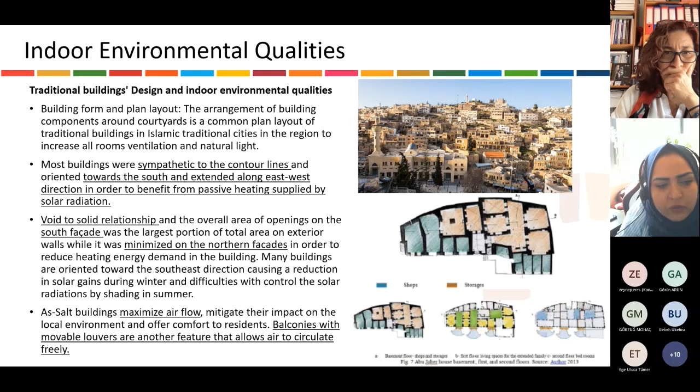And many buildings had balconies with movable louvers, another feature that can allow air circulation freely in the building. So the courtyard in those houses was actually a very important aspect of sustainable measures, where there are multiple courtyards in those buildings, whether it's in the middle of the house, on the rear of the building, surrounded, or on multiple levels.

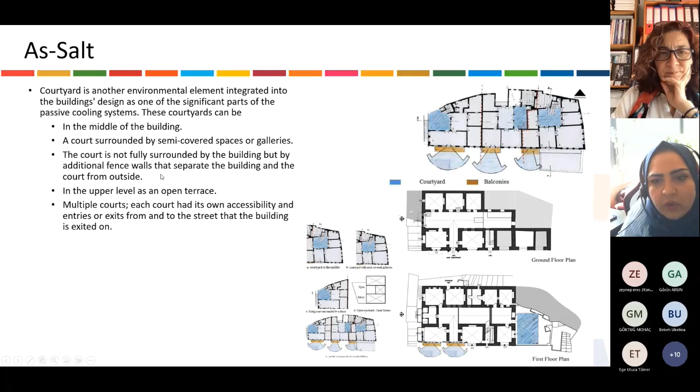Those courtyards have been proportioned in a way that allows adequate shading in summer and allows sufficient solar radiation gains during winter. There are cross openings in those courtyards and on the main facades that allow cross ventilation. Actually, most houses had either a north cool courtyard and a south warm courtyard. These were designed to provide thermal comfort in a building by means of evaporative cooling and cross ventilation.

The cold courtyard is considered to be shaded in most of the daytime, so it's meant to be shaded and it's meant to cool the air coming into the building, while the other courtyard is meant to be not shaded, so that it would increase the solar radiation gain into the building.

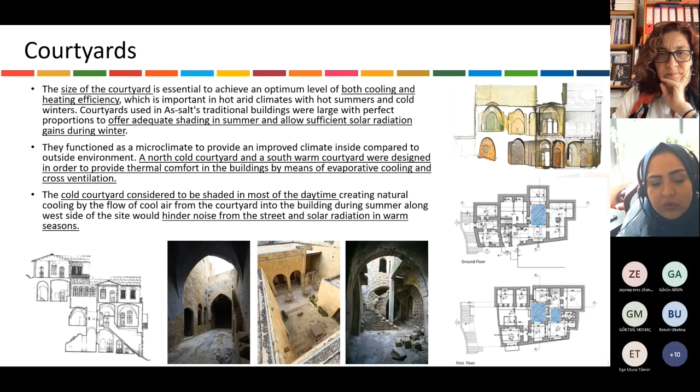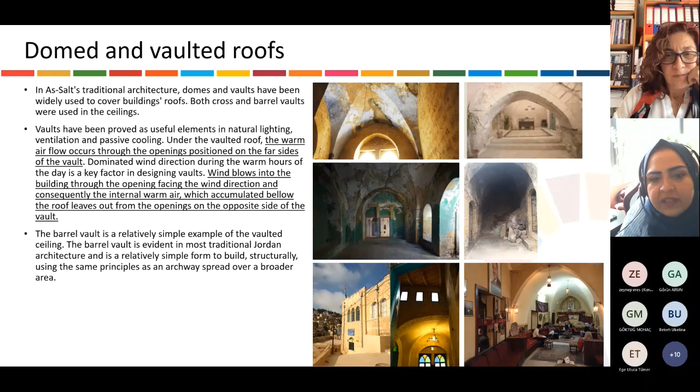The roofs, domes and vaulted roofs are also a very important aspect here. So the thermal capacity of the roofs allows the warm airflow to occur through the openings positioned on the far side of the vault. Still, the wind blows into the building through the opening facing the direction. Consequently, the internal warm air which accumulates below the roof would leave the building from the other side. So that is one of the attributes towards smoothing out that transition between the morning and the evening time.

So the opening itself, the shape of the opening, is more like tall arched openings with clerestory windows, high ceilings in most of the cases, with interior courtyards, looking into the interior courtyard, but also looking into the main facade with different louvers and shading devices. Mashrabiyya was not common, but it was used in some cases.

One of the pictures has it, so it's grilled wooden window screens that are used to control the entry of the sun. And then the location and the size of the window has been also regulated in order to regulate the circulation of the air in the building. Placement of the openings bordering the courtyard is also very important. Clerestory windows have been also used in order to allow this cross ventilation.

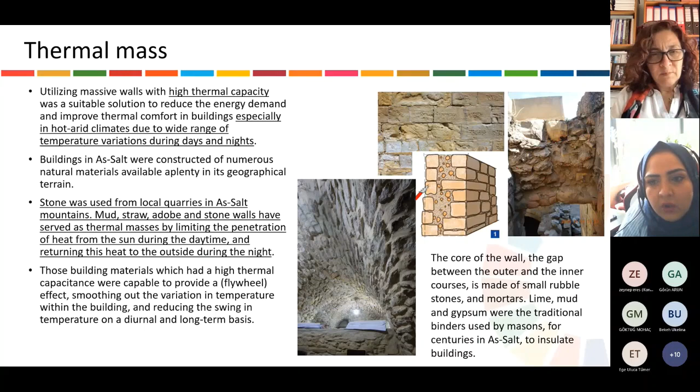Thermal mass actually is a very important aspect here, because the walls were actually very thick. It varies from 80 centimeters to 120 centimeters. The material in between was all filled with rubble stone that acts as a natural insulation. And the material that has been used is locally produced by local quarries in Salt city itself, which also contributes to lowering the transportation energy, with the quarries and the material all from the city itself.

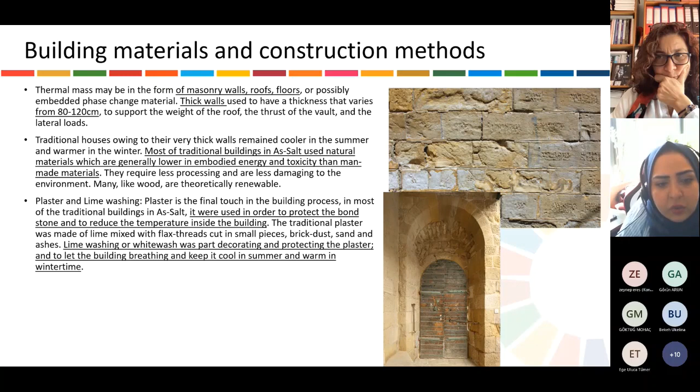Second of all, the material of plaster and lime washing. So the plaster and lime washing are the finishing material over those stone walls, and the plaster is used here in order to protect the stone and to reduce the temperature inside the building. The lime wash is also the decorative aspect, but also protects the plaster and lets the building breathe. So that's the aspect. It's not like concrete. It allows the building to breathe and keeps it cool in summer and warm in the winter.

So in conclusion, feeding back to SDG 13 and to how these lessons from vernacular architecture could contribute to SDG 13, we now need to acknowledge what heritage can contribute to climate change, and we need to learn lessons from it, not only protect it but also use it in contemporary architecture by looking into natural building materials with relatively low energy content and lower transportation energy, by using natural thermal insulation,

by using thermal massing, and by understanding the climate that we are in, in order to understand how we need to mitigate those aspects and not just follow the footprints of what's already there. We need to think of how these aspects were solved earlier on, so that we can think about a way and a methodology to conserve that and to fight against climate change in the next generations.

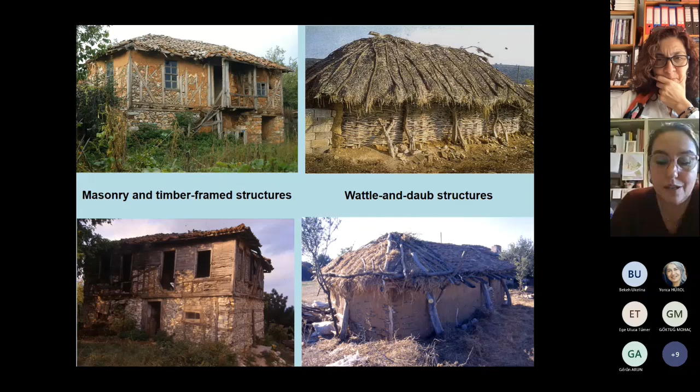Even though oak forests cover the Istranca region, displaying a notably homogeneous environment, diversity in local architectural practices is astounding. One-story or two-story buildings, massive and solid buildings, or houses with semi-open spaces, masonry, timber frame, or mixed structures, and we have to mention especially wattle and daub structures are very common in this region. And cruck-like structures. We know this type of structure from medieval houses of England, the so-called cruck buildings. Because the structural system of these buildings in Thrace is similar to cruck buildings, we use the term cruck-like buildings for these structures.

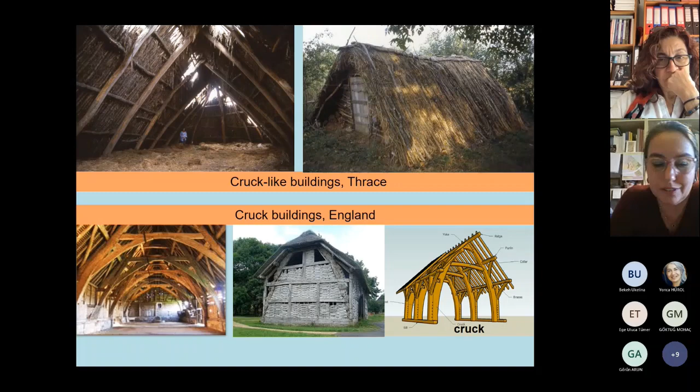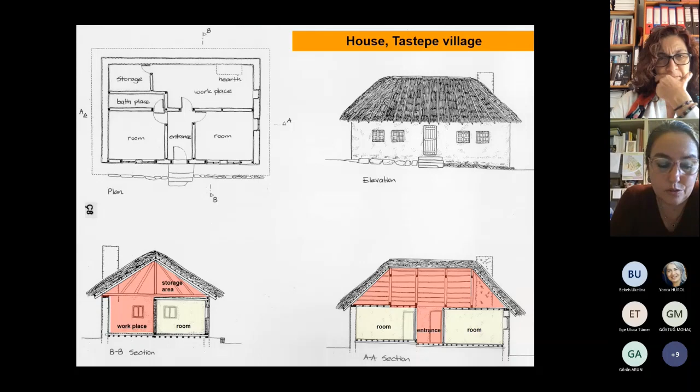The height of the rooms is only 2 meters. The workshop space does not have a ceiling under the roof. The height of this space is more than 4 meters. As the roof is very high, the upper side of the flat roof of the rooms is used as a floor for storage. The north, east, and west walls are masonry, but the south wall, the entrance side of the building, is wattle and daub structure.

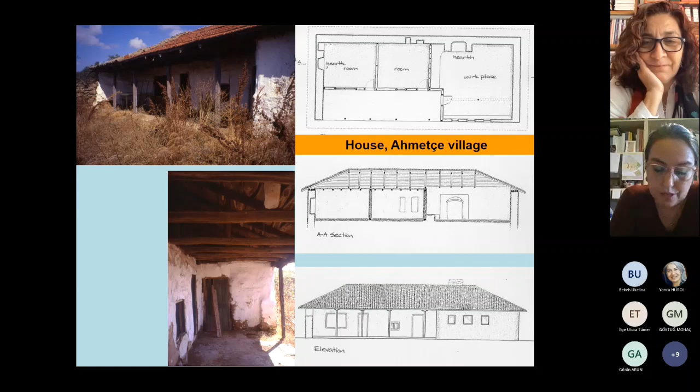This house is located on the southern slopes of the mountainous area. It has a low pitch roof covered with tiles. This one-story house has a semi-open corridor in front of the rooms. All the rooms are open to this corridor. They don't have an interior connection. Like the previous ones, its northern walls are masonry, but the south facade is wattle and daub structure.

And when we think about the diversity of the architecture, one of the reasons is the variety of building material. There is oak in the forest, limestone and andesite in the rocky areas, earth and reeds around the rivers. All these materials are useful as building materials. And the traditional demography of the region should also be considered. There have been Turkish, Greek and Bulgarian villages in history. The first house that I showed you is a Bulgarian house, the second one is a Greek house, and the third one is a Turkish house.

As you know, from the 18th to 20th century, the Ottoman Empire lived through a lot of wars all over the country. During this process, communities from the Caucasus, Crimea, and especially from all over the Balkan Peninsula moved to this region. In the beginning of the 20th century, the Greek and Bulgarian communities left the area. So the newcomers sometimes established their own villages in their own tradition. Sometimes they were settled in abandoned villages. So they lived in these villages, and over time they transformed the buildings according to their tradition. Or they used the old buildings and built new houses in their own tradition.

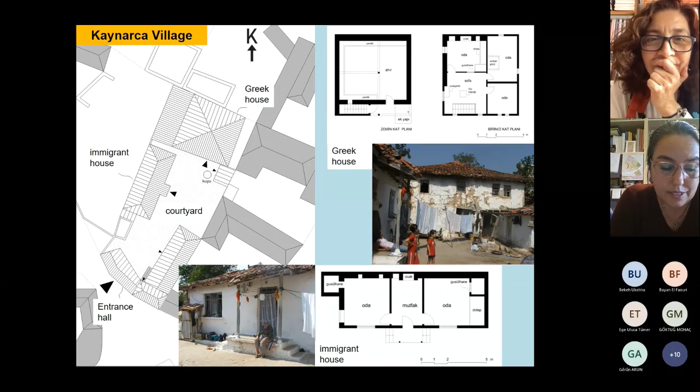For example, in Kaynarca village, because of the population exchange agreement in 1923, the Greek house was given to an immigrant Turkish family. In time, when the family needed more space for their children, they constructed a new house in their own tradition in the courtyard. This is a very typical West Thrace Turkish house. So we can say that, like the towns, villages can be multi-layered as well.

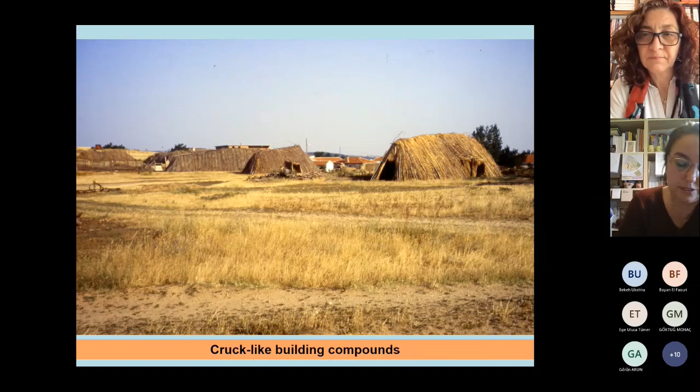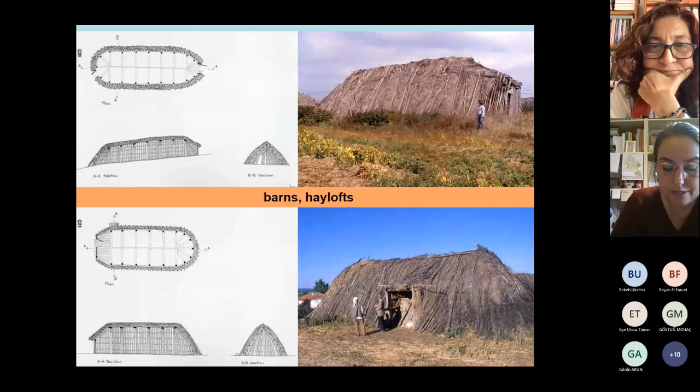These are examples. For example, these are huts. They are round or ovoid-shaped buildings. And these are barns, haylofts, and they are linear-shaped buildings. There are sheepfolds. They are in curvilinear form. This structural system is suitable for creating different forms in architecture.

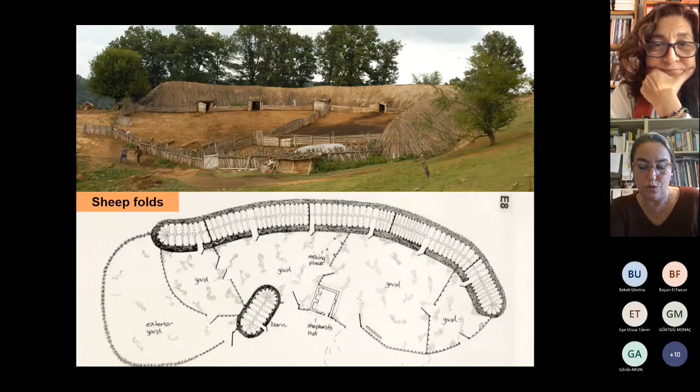Our study on the architectural heritage of the region has indicated that the cruck-like structures that we had encountered in Eastern Thrace was a practice widespread beyond the present political borders in Greece and in Bulgaria. Accordingly, developing a mutual understanding on shared architectural heritage is possible only by holistic approaches working beyond the borders.

One other significant outcome of our work in Eastern Thrace has been to view the connection between the wattle and daub architectural practices of our times with that of the distant past. What we have observed in the present-day villages of the Istranca region is almost identical to the early prehistoric cultures of not only Turkey but also of a much wider geographic region extending to most of the Balkans.

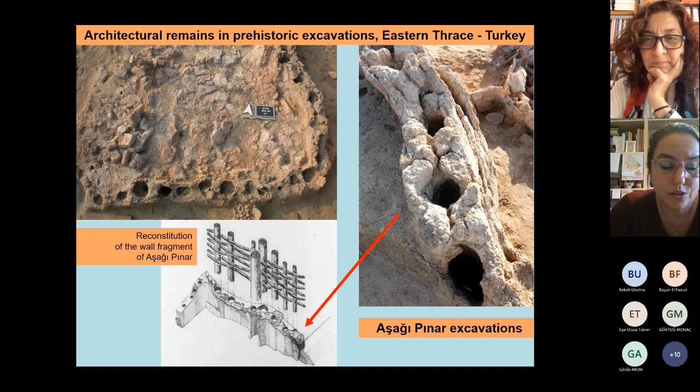Our study has revealed how the use of wattle and daub architecture was practiced and evolved through a period of over 8,000 years. Here you can see the architectural remains of Aşağıpınar excavations in Eastern Thrace in Turkey. This is our excavation and our reconstitution study for the wattle and daub walls. And here you can see the reconstitution drawings of these building remains. So these are the houses of Aşağıpınar in 5000 BC.

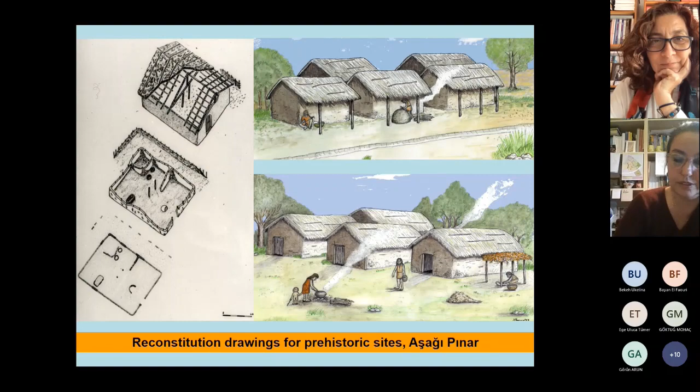The forms of those buildings resemble those of rural structures of our times, enabling to link the past with the present, if not culturally, at least on the basis of technologies implemented through several millennia. We might also conclude that the remnants of present-day village architecture constitute a time lapse in visualizing the architectural remains of the distant past. And our second study area has been the western part of the Urfa province.

There, within the framework of an inventorying program, we have surveyed 413 villages distributed in an area of about 1,700 square kilometers and documented the traditional rural buildings of the region. And our lovely colleague Ege Uluca Tümer also joined our study for one season at that time.

Here you can see some examples of the buildings, mud brick structures, masonry structures, one-story, two-story buildings. Parts of the region extending along the valley of Euphrates and the plain of Suruç are mostly alluvial flatlands separated by undulating plateau occasionally broken by rocky outcrops. At present, the region displays steppe conditions, being devoid of any forest cover. This is a very typical view of the region.

And our work in the Urfa region has revealed the presence of three basic plan types. The first, flat-roofed, long rectangular structures with entrances usually from the center. The second, with open porch entrance, the so-called iwan, again flat-roofed type. Third type is a multi-roomed structure, almost cellular, each unit being closed with a conical dome.

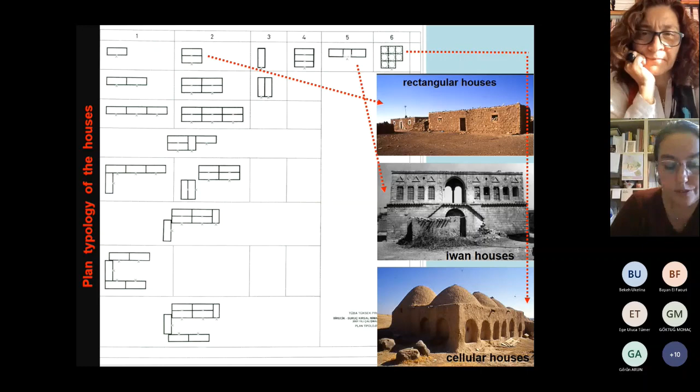In this respect, in strong contrast to that of Thrace, the region displayed a notable homogeneity in types of rural structures, being reserved to the above-mentioned three plan types. This uniformity of structural types, in view of dynamic population movements that took place throughout historic times as well as at present, we have found to be of considerable interest.

An example for long rectangular buildings: this is a very simple flat-roofed house, just one room and two ovens, one inside, the other one outside of the building. The building is a pure basic prismatic form, but the triple arch facade is quite decorative.

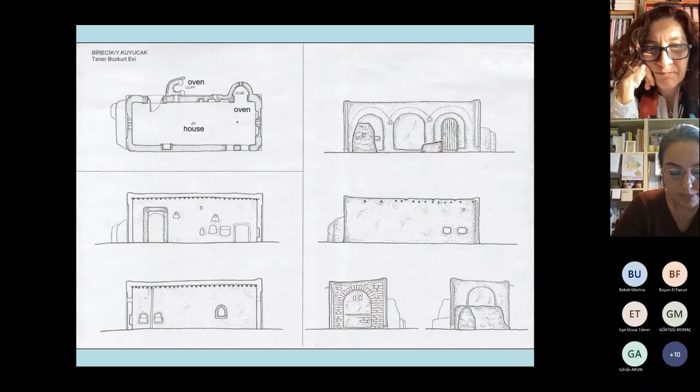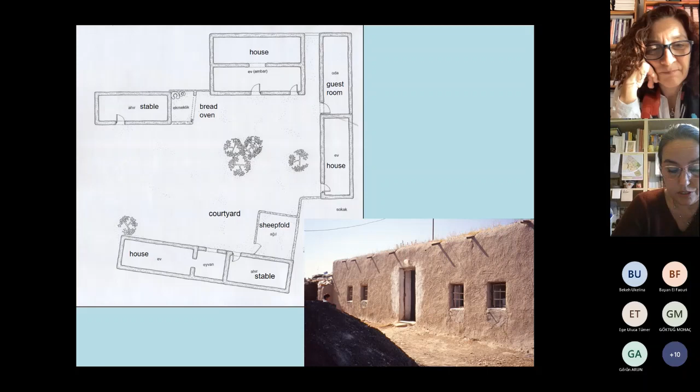This is a house compound of a family. Each building has a different function: house units, guest room, stable, barn, sheepfold, and they surround a courtyard. This house compound contains all the units of a small-size enterprise of traditional agricultural economy. And another example for flat-roofed rectangular houses.

So-called cellular houses, also named pseudo-domed mud brick houses, are one of the basic plan types of the region. The domed structures are located mainly in the Suruç Basin. We observed such kinds of structures in 139 rural settlements. Here you can see some examples of domed structures. In 2002, we counted 2,760 domes in the entire region.

The domed constructions are formed by the juxtaposition of small square units of 4 meters in length maximum. The articulation of units may form huge complexes. A domed dwelling may also contain places for food production, guest rooms, workshops, storage rooms, haylofts, barns, and stables. Here you can see some different functional parts of a household.

Interior of the domed spaces. At the top of the dome, there is a hole. It's actually a flue. As there is an oven in the center of the room, this hole is used as a chimney.

Along with field documentation considering these types of structures as cultural indicators, our study also covered defining their distribution in space and in time. It is also interesting to note that Sir Layard, while working on the archaeology of this region, had documented a village entirely of similar domed structures in the vicinity of Aleppo in 1853. Likewise, Edward Wanze, a German explorer working in the region in 1912, had noted that domed structures had a distribution area from Suruç and Harran plains in the north to Aleppo, Hama, and Homs in the south.

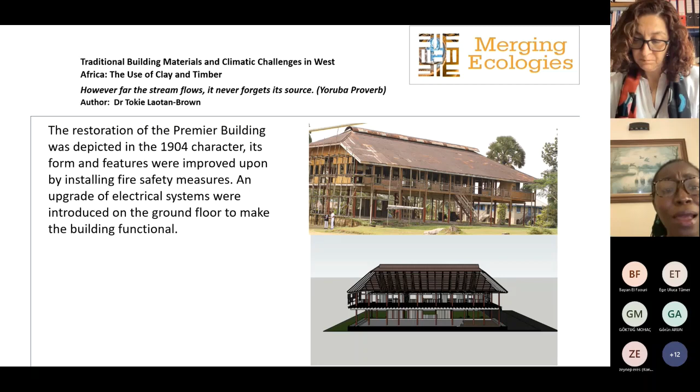And this is what we're hoping the building would look like. Thank you very much. Thank you so much.

An interesting journey in West Africa, and seeing all these vernacular examples. I think it's really what you are doing, like trying to change the mindset, or shift the mindset basically, for remembering the traditional ways of constructing. Anyway, I will have some questions, but let's go to our last but not least speaker.

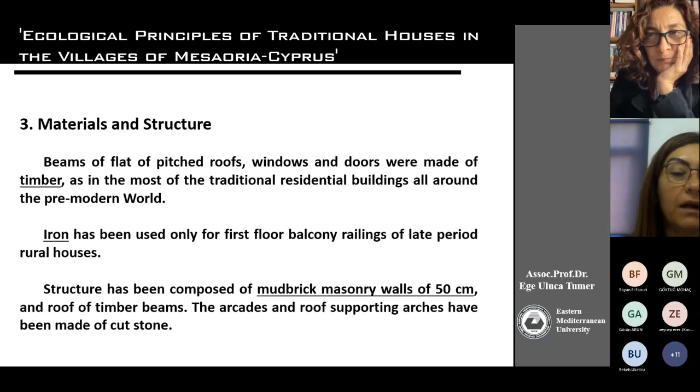Iron is very rare. We see the use of iron only in late periods in the 19th century. The mud brick masonry walls were around 50 centimeters thick. The arcades and roof supporting arches were cut stone.

This is an example of Mesaria houses, from Akdeniz Lisi. We can see the use of mud brick on the side wall where the plaster has been detached, and here again another mud brick masonry wall where the roof has collapsed. We see the doors and the stone surrounds around them.

The doors were wooden, though we see some of them have changed. Again, we see another example of a timber door and stone surrounds. This is the iron railings from the late period houses, on balconies.

I want to talk about the main architectural components, the main spaces in these buildings. We see a very modular design: the room is the main unit, arrayed in linear order on the ground floor due to increasing demand or according to the wealth of the owners. We can have more rooms, one room, two, three, four, it can increase, but it's a linear organization. In the early periods there used to be an upper story, mainly a single room, called Hanay in Cypriot Turkish.

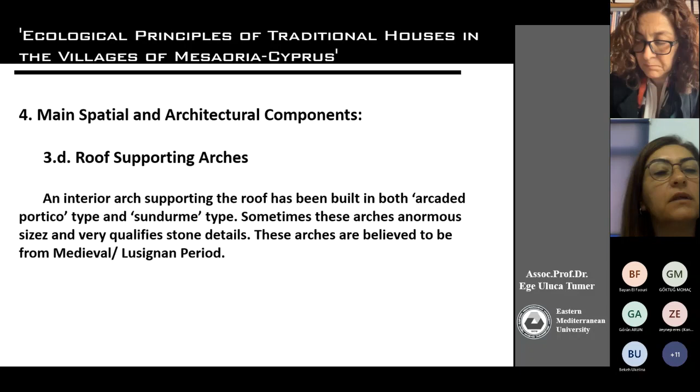So the roof supporting arches, it's a very important element of the plan. We can see some examples of them. We see some examples with large beams to support the roof, but these wide arches are much more common than the beams, because it was not so easy to find big beams of the trees. And I think they were very skilled in building these wide span arches.

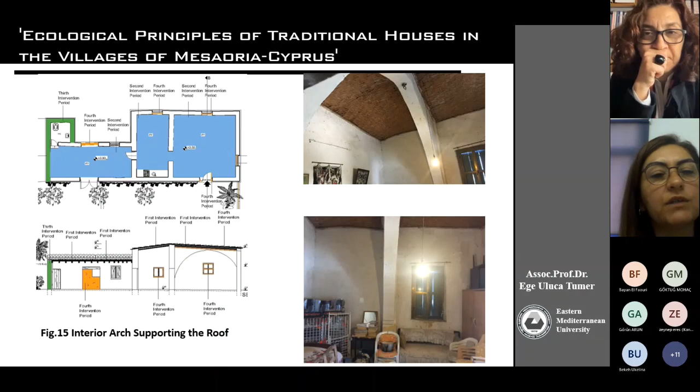So we see that they use these arches in both directions, you know, in the middle, just under the pitch of the roof, or the other direction. We can see again another interior arch supporting the roof. And the roofs were flat or slightly inclined because there were no heavy rainfalls or snow.

Reed mats have been used on top of the timber beams in both cases. On top of the flat roofs, mud roofing materials have been used. And then they started to use terracotta tiles. It's a later usage. We can see how these reeds were placed on the rafters, and some mud was coming on top of it, and this mud was like a mortar.

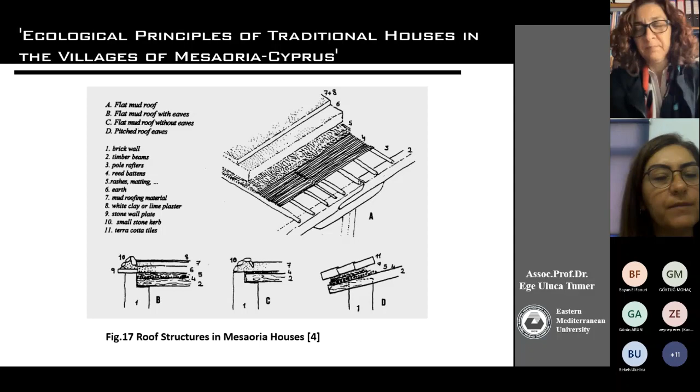I listened to the villagers, and they said that one year they were using the wet mud mortar, and one year they were using just the earth. So they were doing a periodical maintenance to these roofs to keep them well insulated. We can see again some examples of the roofs.

Courtyards, yes, there are courtyards in the village, but their borders are not very easy to define. Most of the garden walls have disappeared. But of course, they were using these open spaces, especially for ovens, storage rooms, for daily activities, for wells, daily cleaning works, and agricultural production activities.

So what do we have as environmentally responsive design features here?

We have thick mud brick walls, minimum 50 centimeters thick. We have wooden shutters. We have semi-open eyvan-type sündürmes on the south, creating a cooling effect. We have south-oriented arcaded porticos providing shade during summer and sunlight during the winter. We have the openings on the west, letting in the western wind, which is the prevailing wind in the area.